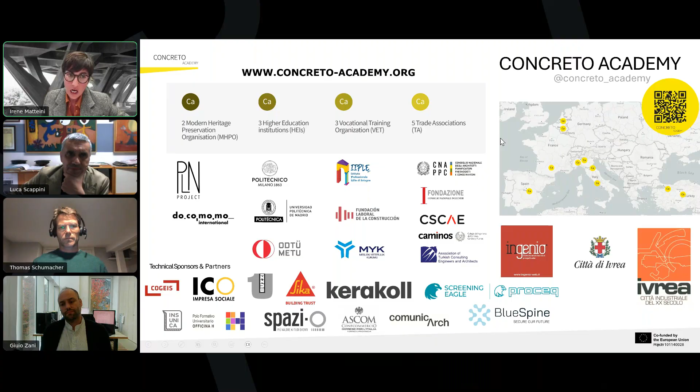We are now entering our third year, and we have a very large consortium of partners and technical sponsors that have worked hard to make this program successful. We address the increasing demand for specialized skills and craftsmanship in the conservation and preservation of concrete structures through different activities: online lectures, technical seminars like this one, field sessions, and practical laboratory exercises where professionals work with the people actually performing the work in the field. The ultimate goal of CONCRETO is to bridge the gap between the academic world and the professional construction world.

With that, I'd like to get to the topic of today. We are exploring the important role of conducting assessment, proper diagnostics, and monitoring for concrete structures, which should always be the first step we take when defining any repair intervention. We have two presentations today attempting to tackle the importance of this topic.

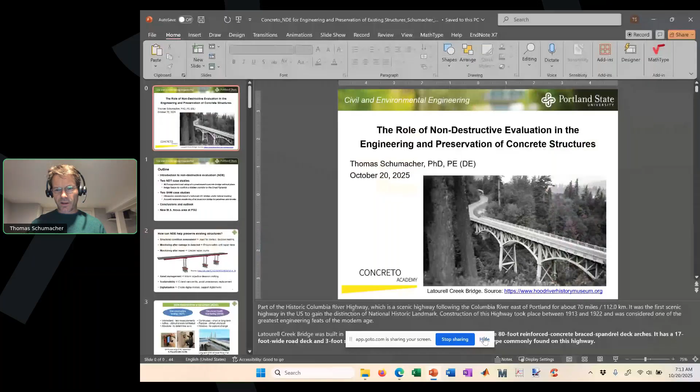Thank you again for having me today and giving me the opportunity to talk to you. As Irene said, I'm currently located in the US, but I grew up not too far from where you all are, in Switzerland. I've been very interested in non-destructive testing, specifically non-destructive evaluation, and I've always been interested in concrete structures throughout my apprenticeship in Switzerland and also through my studies.

This is a bridge actually located in the United States. I always like to show this first. This is Latourell Creek Bridge. It was built in 1914 as a 3-span bridge, a very interesting arched bridge with a truss system that's still operational today. Beautiful structure. It's located nearby a hike that we do with my family on a Sunday morning once in a while, on the beautiful scenic Columbia River Highway just outside of Portland. This is one of the structures that motivates me as to why we should really preserve the historic structures we have built.

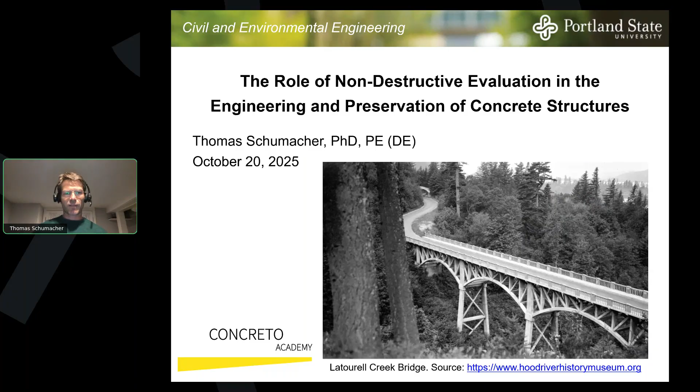A quick outline: I want to talk a little bit about non-destructive evaluation, what it is, and how we in the United States at least think of it. Then I have two case studies on non-destructive testing, both with a focus on imaging. I want to make the case for how useful imaging is, that it might not be as complicated to do as one thinks, and how much we can learn from it.

I have two studies. One of them, which will take the majority of the time, looks at a pre-stressed concrete bridge where no existing plans were available, but where an engineer needed to do a load rating, or structural evaluation. Imaging turned out to be extremely helpful in creating a digital cross-section of this bridge.

Then I want to show a project that's always fun to share. I've gotten involved in the Scan Pyramids project a few years ago and been very active, and I want to show some image fusion results there and how they were helpful in confirming a hidden corridor.

I have a couple of structural health monitoring case studies, but I don't want to spend too much time on those because our next speaker will talk more about it. I wanted to show how NDT and SHM can be used together to help with engineering and preservation of existing structures, then some conclusions and outlook. I'll also highlight a new Master of Science focus area we've created at Portland State University in this field.

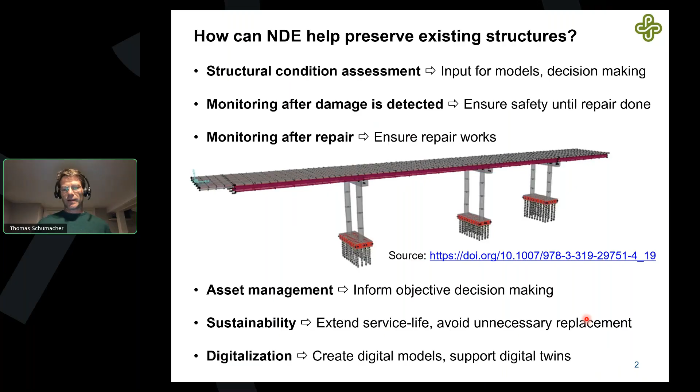Often we have models that might not be as accurate and might tell us we need a replacement, but if we install a monitoring system and use NDE, it might tell us that stresses are not as high as we thought, and we can extend the service life quite a bit. Then there's digitalization, an important term we talk more about now. We want to create digital models, digital twins, computer models that reflect as much as possible the actual structure. That lets us do tests, evaluations, and helps in decision making for maintenance and repair.

So what is non-destructive evaluation? We think of it as two approaches underneath. One is non-destructive testing, where we take an instrument or device to the structure - it's active, we control the stimulus, imparting a pulse that could be a stress pulse, an impact, or an electromagnetic wave like in radar. We control the source and look for the structure's response to it.

This gives us a sense at the time, a snapshot of the structure in terms of the geometry, or we could try to determine the condition of the structure. We do that once in a while - deploy instruments, then take them back off. Here's an example of a ground penetrating radar device a student applies on a concrete test specimen in my laboratory, for one of the graduate courses I teach.

Structural health monitoring is more continuous, long-term. We put sensors on the structure - it's passive, so we let the structure tell us what's going on. We record the response. We could also use active stimuli like a test truck or an impact, but typically it's passive, and that tells us the relative changes. We can't quite tell the condition at the time we start monitoring, but it will tell us when something changes.

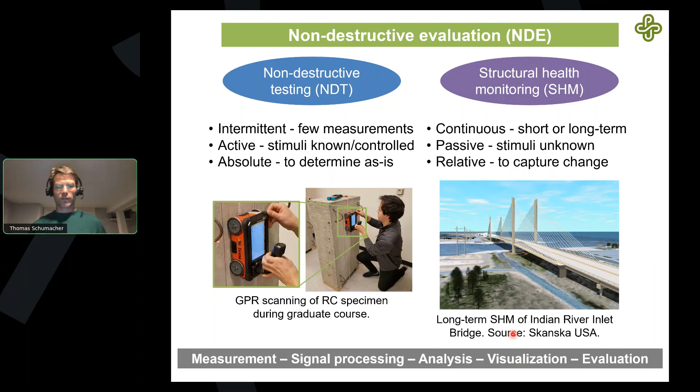Both NDT and SHM fall under this bigger term NDE - the terminology some of us have adopted in the US. Some terms are also used interchangeably. But underneath all of these is the idea of measurement, signal processing, analysis, visualization, and evaluation. These are terms civil engineers - that's what I am - are not always trained in, and that's what we're trying to push for, to bring more of these skills into the curriculum.

I'm active in the American Concrete Institute and used to be chair of the Structural Health Monitoring Committee. During my time, we produced a report that you might find helpful, which talks about the different technologies used in structural health monitoring for concrete structures specifically. We are now working on a second report that focuses more on what to do with the data produced by these technologies.

I'm now chair of Committee 228, non-destructive testing of concrete. You might be more familiar with this one. This is a pretty established report showing the different techniques used for non-destructive testing of concrete. We are currently working very actively on revising this report, which is over 10 years old, updating it with the latest information.

So how do we combine them? One idea might be like when we go to the doctor and get a snapshot. The doctor might listen to our heart, take our temperature, look at other things, do a blood test, and that gives an idea of the condition at that time. That symbolizes non-destructive testing. If there's an issue, we might get a heart monitor or some other sensor to wear, and that is the idea of structural health monitoring. From then on, we can keep track of what's happening and get real-time information.

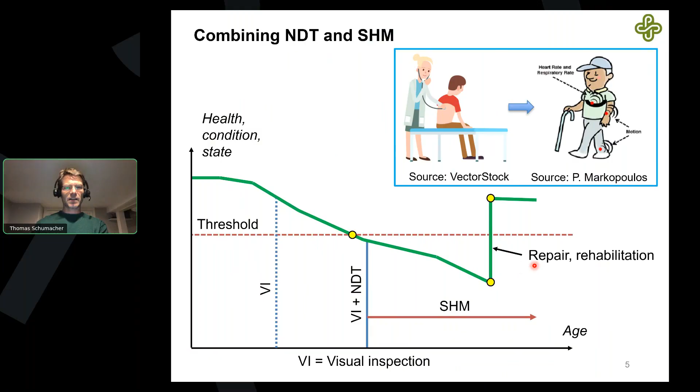Let me get into my two case studies. These first two case studies are basically related to non-destructive testing.

The first one is this bridge. It's not a particularly glorious structure, but it's very important for the owner. This is the only access to a non-profit organization that helps people with addiction recover. They were faced with delivery people saying they would no longer deliver across this bridge unless shown the structure could hold the weight of their trucks. So a structural firm was tasked with doing a structural evaluation, what we call load rating in the US, of this bridge. Because it was privately owned and built in the 1960s, there were no plans or drawings of any kind.

You can see this bridge has some green on it. This happens when a structure is exposed to the environment, and we're in the Pacific Northwest where we live. There's a lot of rain in the fall, so there's a bit of moss buildup. The good thing is, historically, no de-icing salts have been used in the Pacific Northwest, where we do get some snow but not much. So corrosion was not expected to be a problem. The visual inspection showed the underside of the bridge was very dense, with no cracking anywhere, just a bit of this moss. But the problem was we still didn't know what was inside - we really had no idea. It's simply supported, about 14.6 meters long.

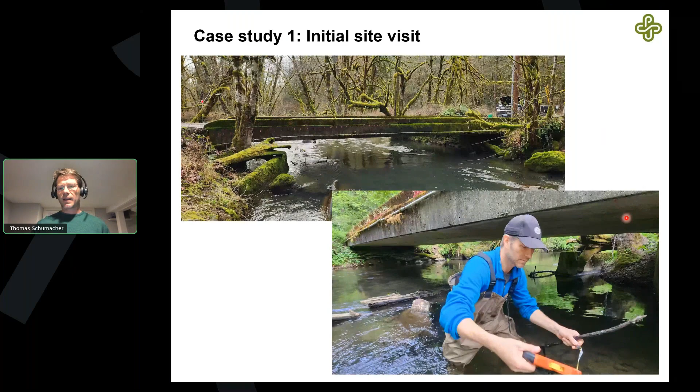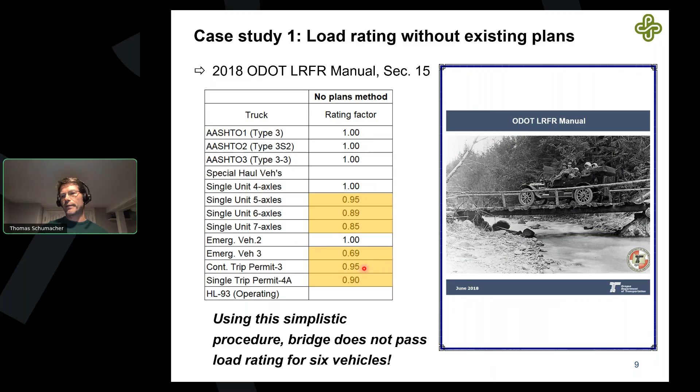For imaging purposes, we have GPR, ground penetrating radar. We did some impacting to do vibration testing. We also used a cover meter to measure the cover thickness of the pre-stressing strands at the bottom. I was able to convince the engineer that I want to drill a hole in the middle, vertically from the bottom, to hopefully reach that middle void we thought should be there, so I can measure that distance and determine if there's any water inside.

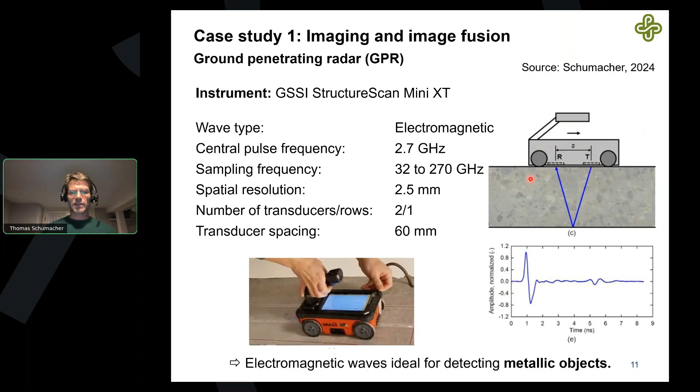This is about 40 kilohertz, based on an elastic stress wave. It's in the ultrasonic range, like 40 kilohertz is ultrasonic, so not in the audible range. The spatial resolution is up to you. You can basically put this instrument down, take a measurement, move it to the next position, move it to the next position. For this project, we used a 50 millimeter step, which gives you a spatial resolution of about 10 millimeters.

Stress waves or ultrasonic waves here are really ideal at detecting air voids and boundaries. So this is what you can use to get the thickness of a member, or in our case, we were hoping to see the voids inside, if there are any.

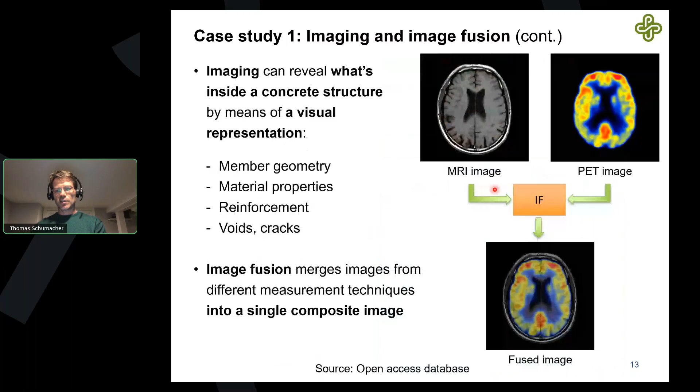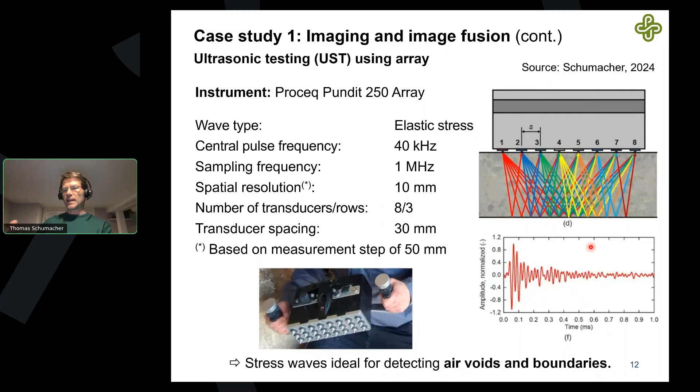So if my point happens to be on a reflector, then hopefully in the signal there will be an actual big amplitude that reflects that reflector. We're basically focusing with this SAFT method, trying to get the reflectors to get the big amplitudes in the signals and have them focused on these reflectors.

You might be familiar with a B-scan. A B-scan is a little different - it simply lines up all these signals side by side. This is a step further. This is really aiming to focus the energy to the reflectors.

There's two unknowns that we have to determine. One is wave speed, as I said, we calculate distance divided by wave speed. The wave speed needs to be determined - that's a function of the material. And there's a time offset in there that we also have to guess so that the reflectors eventually line up in the correct position.

So there's some calibration required. The cool thing is that once we have wave speed, that actually tells us a lot about the material. If we have a very stiff concrete, in the case of ultrasound, the wave velocity will be very high. If we have a low strength concrete, the wave velocity will be low. So there's some additional things we can learn.

There's a lot of processing that goes into this, and I want to stress there's no one way to create such an image. There's many things that can be done to enhance the image, so one image done by one person might look different than an image done by another person.

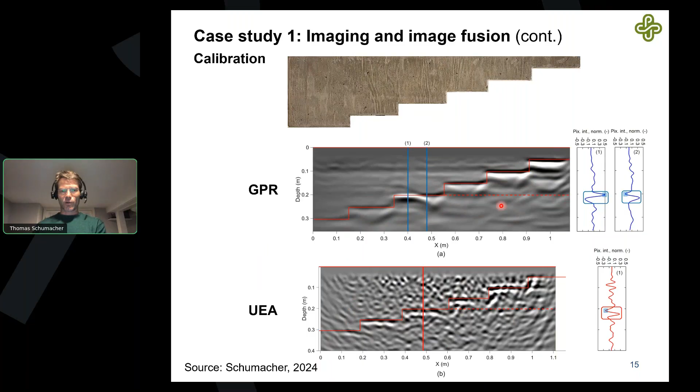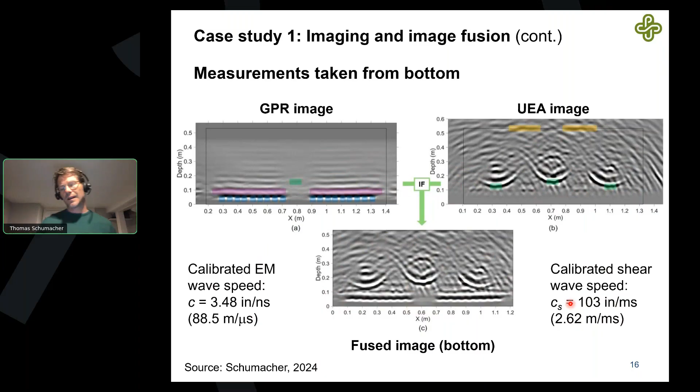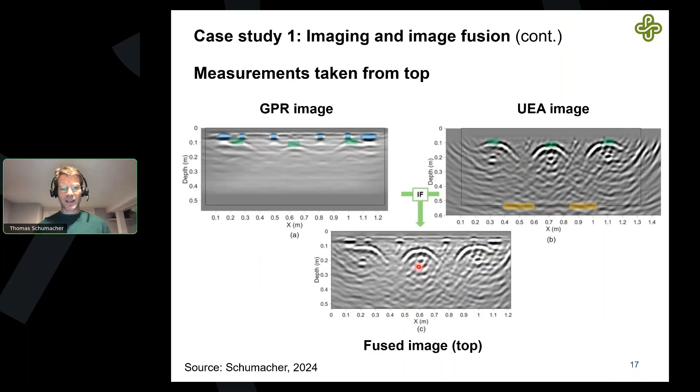We fuse them together, we get this. And then we said, okay, why not fuse the bottom and the top together? So we have this image here from the bottom, we have this image from the top, we fuse them together, and now we basically have a cross section that we can work with. It's still a little bit noisy, but we have all the information in here. We see the voids very clearly, we see the reinforcing on top, we see the pre-stressing strands at the bottom, and we know that they are correct because the reflectors of each match, and we also could see the back wall. So this is now a confirmed image that we can use. We can go in and actually read out dimensions. I will revisit this.

Here's just some results from the vibration testing. I used a simple cell phone based measurement here - that's phyphox, an app that you can use to measure the vibrations, the acceleration response. We just jumped on the bridge, measured the response. We identified some modes, some flexural modes of the bridge, some torsional modes.

We did build a finite element model, a slab model, and came up with these, basically played with the material properties, and we also tried to fill the voids with water and fill the voids with air. And the best results we got to match these peaks in the model told us the voids are most likely air filled.

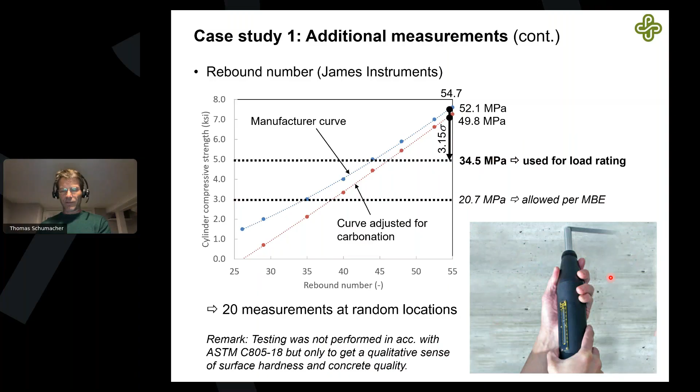There was really no indication, just looking visually at the drilling combined with these measurements, that this should be a problem.

With the rebar detector, we used this Profoscope to get a mean cover of about 36 millimeters for the pre-stressing strands at the bottom. This is showing a photo from inside the duct, looking at the formwork. We drilled from the bottom into the middle void and pushed the camera up, and you can see the formwork material. No water came out, which is a second confirmation these voids are dry, not water filled.

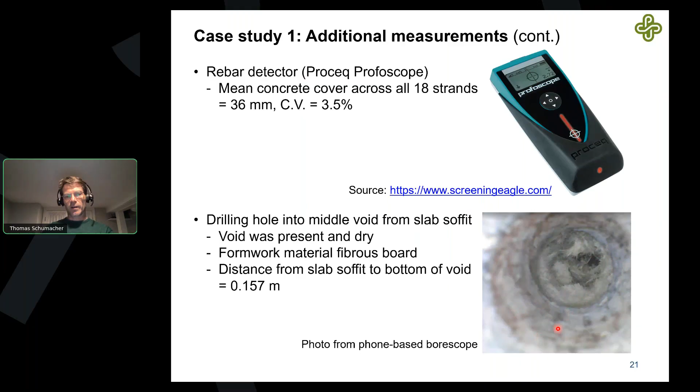We also showed this fibrous board. The measurement from the bottom of the slab to the bottom of the void was about 157 millimeters. So we can take this and determine all these measurements, including the size of the void, which helps us determine the self-weight of the structure exactly, an important part of the structural evaluation.

Based on the reflectors, we can measure the cover. In the image we got about 38 millimeters, and the rebar detector said 36, so we're very close there. The distance from the bottom to the middle void in the image told us it's about 155 millimeters. We measured 157, so we're within a couple of millimeters. This has turned out to be very useful.

This is what we anticipated, and this is what we had, and it turns out they were very close, except for the cover of the pre-stressing strands, which was a little bit different. But now we knew exactly what to work with.

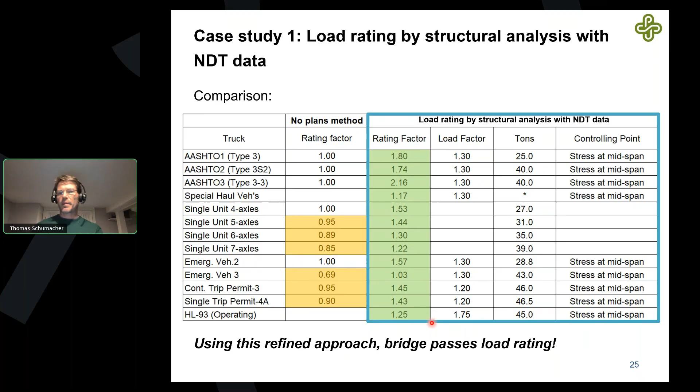The engineer redid the load rating, this time using the exact digital cross-section I showed you earlier with the simplified method. We now had rating factors that were basically above 1, even for emergency vehicle number 3, meaning this bridge is safely able to carry all the different truck types that are legal in Oregon, including emergency vehicles. That was a big relief for the owner of the bridge, so very useful.

Case study number 2 is about the Scan Pyramids mission. I want to show you how imaging was very useful here. This is the Great Pyramid in Giza, and this is the north face. You can see what we call the chevron. Right below these big chevron blocks was the original entrance to the pyramid that leads to the different chambers.

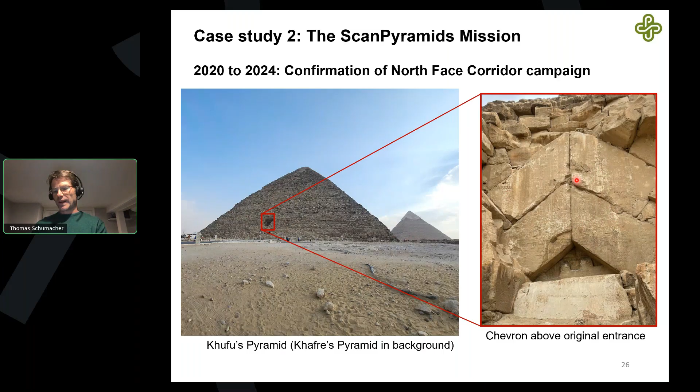There was a suspicion that behind these blocks might be a hidden corridor, determined based on measurements done with muon tomography. Muons are particles that exist in the universe and fly around. They're not harmful, but if you set up detectors and detect them, it's basically the analogy of X-raying the pyramids, but done with a passive source using these muons.

These measurements were done in the 2015-2017 range. Scientists from Japan said there might be a big void currently not known in the pyramid. This is a cross-section through the Great Pyramid showing existing known structures: the Queen's Chamber, the King's Chamber, the Grand Gallery, and so on. But they said there's a big void deep inside the pyramid, and behind the chevron it appears there might also be something.

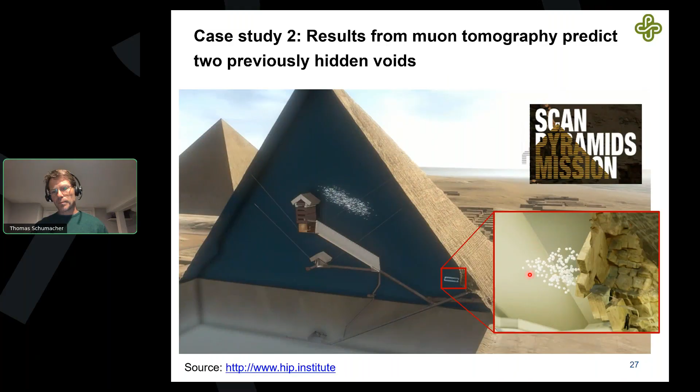So we were pointed to this area. We went there and applied radar and ultrasound with the same tools I introduced earlier. We also used electrical resistivity tomography, which gives an indication of the electrical resistance of the underground. These three techniques were applied to the chevron blocks, which you can see are over 2 meters wide.

This is the application of radar in the vertical direction, pulled up by a cart. Here's one radargram showing a strong reflector at about 90 centimeters depth. This is ultrasound, again the same device, applied in the horizontal direction in this case. At a depth of about 90 centimeters, again a very strong reflector showed up.

Electrical resistivity tomography - these are the electrodes glued on or attached. You inject the current, you measure resistivities at the other electrodes, and you can then reconstruct the resistivity map. This is actually a vertical cross section, and these are the chevron blocks here. You can see there's a high resistivity volume behind the blocks, and that's one of the things we couldn't tell with radar or ultrasound.

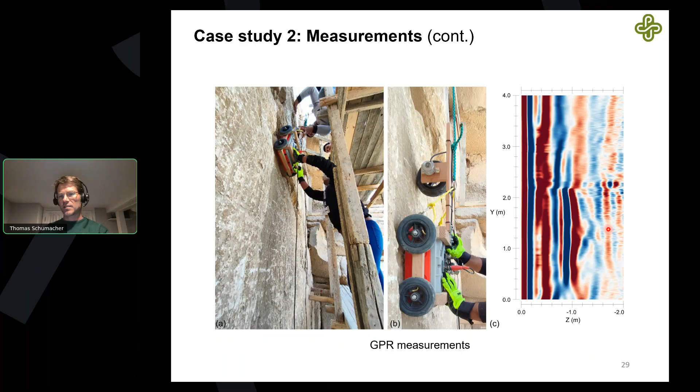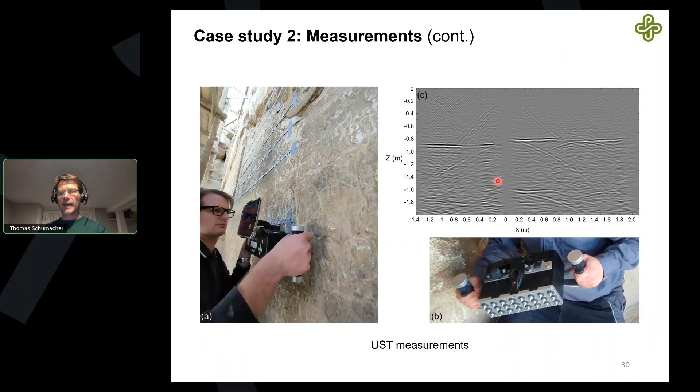We could tell there's a reflector, but what you can't tell is what is behind that. Is it just a 1 centimeter air gap? Is it a 1 meter air gap, or is there an even bigger void behind? Electrical resistivity tomography showed that there might be a much bigger void behind it.

Imaging and image fusion then helped us reveal that. I'm showing here a view of the chevron again, with a horizontal cross-section on this side. This unites all 3 measurements - we fused the images from GPR, ultrasonic, and electrical resistivity tomography together. We could see very strong reflectors here in 2 locations, around 90 and a little bit more like 80 centimeters, and then behind it there's this big high resistivity volume, indicating that there might be air.

On this side, you see the reflector, based on a GPR measurement. So we were basically able to show that in this horizontal cross section, there's the blocks that we can see, blocks 3 and 4, and behind it might be a big air volume.

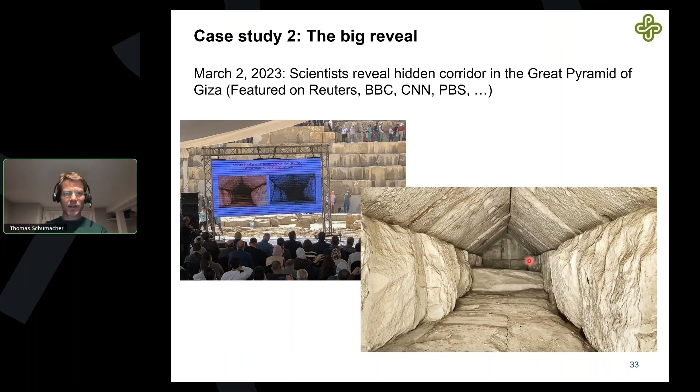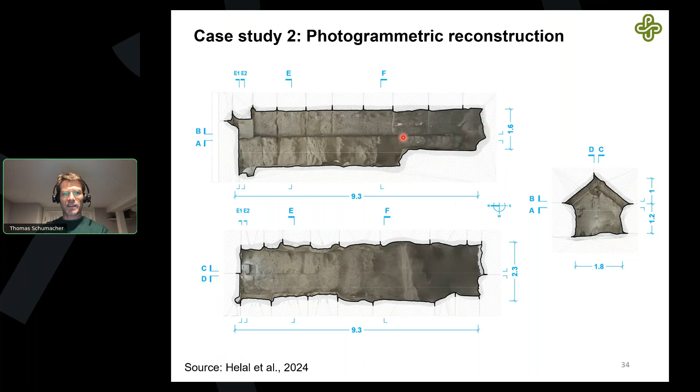And that's what was revealed in March 23. They were able to push a teeny little camera from below into this, and that's what they found - this cross section, about a 9-meter long tunnel. That was a big reveal. Since then, researchers have created photogrammetric reconstructions of the tunnel, giving you a better sense of what it looks like.

I want to mention that this is a big effort. I work with the Technical University Munich on this project. Cairo University is really the technical lead on this, and everything, of course, is under the scrutiny of the Ministry of the Antiquities of Egypt. But we are a big international team working on this, and this is ongoing.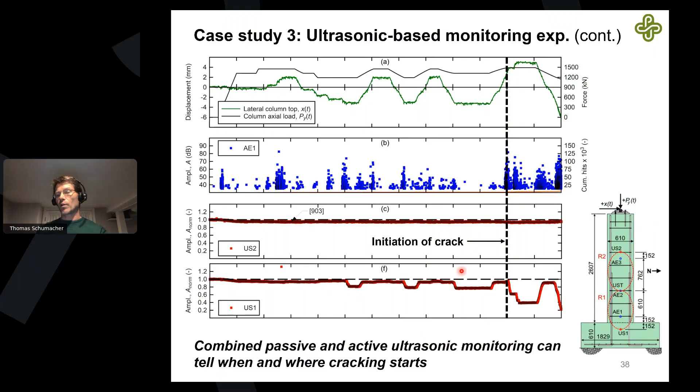So here we wanted to show that these two approaches can also be done with the same equipment, and can be very useful to assess a concrete structure over its lifetime. Here there was some emphasis on an earthquake - so what happens during an earthquake, what happens after an earthquake.

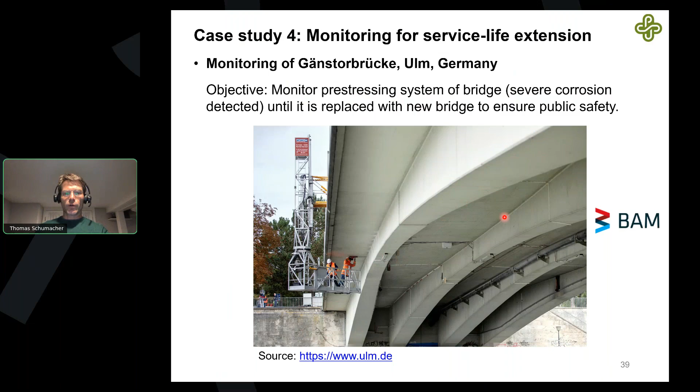This is a real-life study where passive ultrasonic monitoring, so acoustic emission monitoring, was used to monitor pre-stressing wire breaks in an old system in Germany that had issues with corrosion. They instrumented the whole bridge with strain gauges, displacement sensors, and the green sensors you see are acoustic emission sensors, based on ultrasound.

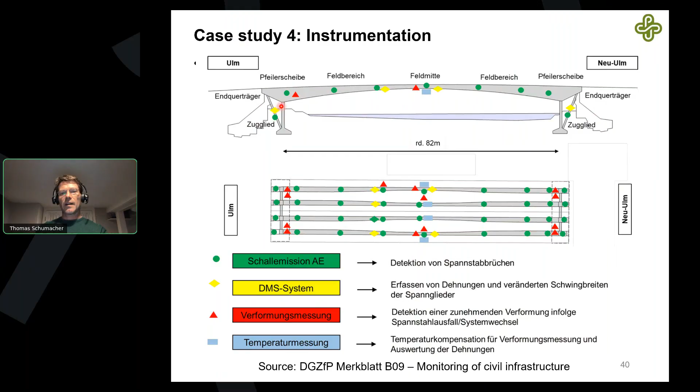This bridge is now being replaced, but it was a really great case study to show how structural health monitoring can be used: a problem is found, the bridge is instrumented, and it can be kept safe. I think the maximum weight of trucks was reduced to make sure there were no issues, as a way to keep the structure safe for the public while you figure out a solution.

So to wrap up, NDE—both non-destructive testing and health monitoring—I think is a great support tool that is helpful in the engineering and preservation of existing structures. With NDT, specifically with imaging, we can really get an idea of the structural condition as it is, a snapshot. And with SHM, we can then monitor changes over time.

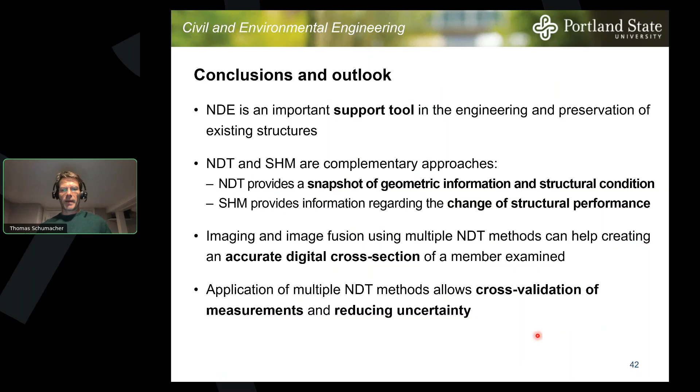We can get really accurate digital cross-sections. If we can do all the measurements that are useful, it's not that difficult to do, but extremely helpful. And using multiple methods at the same time is always recommended for cross-validation of measurements and reducing uncertainty.

Thank you, Irene, for the introduction, and good afternoon everybody. First of all, I would like to thank the Fondazione and the CONCRETO Academy for having me here. This is a nice occasion to share with you some of the information I gathered over the years working on several infrastructures distributed across the Italian territory.

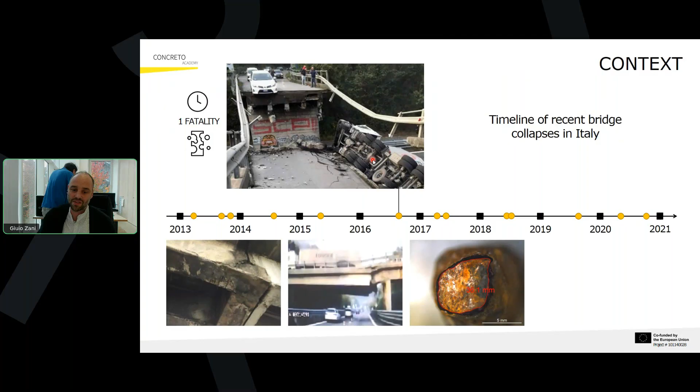First of all, I would like to start with some context, because it's very important to understand the place in which we're working and the reasons why we need to design monitoring systems and develop diagnostic investigations which help our understanding of the safety level of structures. Over the past decade, we observed in Italy several collapses of infrastructure and bridges.

So what you see in this slide is a timeline of recent bridge collapses which took place in Italy. You see a series of yellow dots highlighting the frequency of these collapses, which of course appears to be quite challenging and quite worrying also for the general public.

For sure, one of the first collapses that raised global awareness and also pushed people into understanding more about existing infrastructure, and pushed politicians and managers into carefully observing structures over time, is the collapse of the Annone overpass. This collapse was related, according to the assessment carried out during the trial, to corrosion-related problems.

So in the presence of severe cracking - you see this picture here inside the Gerber saddle - the lack of robustness led to the failure of the whole deck. During investigations, some of which were carried out here at the Politecnico di Milano by Professor Di Prisco and my research group here in Lecco, it was related also to some corrosion phenomena.

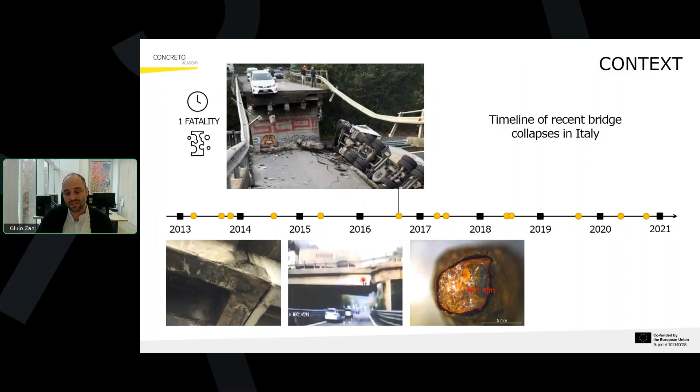So the presence of contaminated waters which attacked the reinforcement, leading to a loss of cross-section and finally to a collapse. But just two years after this event, which took place in Lombardy, we all know what happened in Genova. There we had the failure of a very important structure, the Viadotto Polcevera, which caused 43 fatalities. This was very impactful, and it was a confirmation of a worrying global picture, which stresses the need to carefully observe, maintain, preserve and strengthen existing reinforced concrete structures or existing infrastructures in general.

Something I would like to point out is that everybody observed that the majority of recent structural failures took place in reinforced concrete and pre-stressed concrete bridges. This is a very important point because some people thought that these failures were mainly related to the material itself and not to the lack of maintenance or the natural aging of this infrastructure.

What we need to stress is that way more than 50% of Italian bridges are actually made of reinforced concrete and pre-stressed concrete. This is because concrete still remains today a very cheap material, which can promote the development of infrastructure in different countries, also in developing regions, because of its possibility to be shaped into different sizes and shapes, and to create large infrastructure which can support traffic loads or be used for energy production.

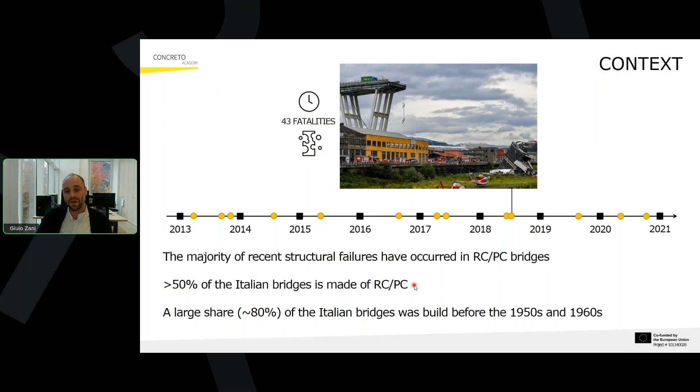So a larger share, about 80% - this is generally complicated to carefully estimate these numbers, but about 80% of the Italian bridge stock was built before the 1950s and 1960s. This is a very interesting observation because we can realize that most of these structures have surpassed the expected service life which was conceived at the time of their design.

So at this point, one might ask, is it just an Italian problem? And the answer is no. Some years ago, I had the chance to attend a presentation by Phillip Yen, who is a chief engineer at the Federal Highway Administration in the United States. The FHWA has in charge about 600,000 highway bridges over more than 4 million miles of roads in the United States. What surprised me is that over about 30 years, between 1980 and 2012, they recorded more than 1,000 bridge failures.

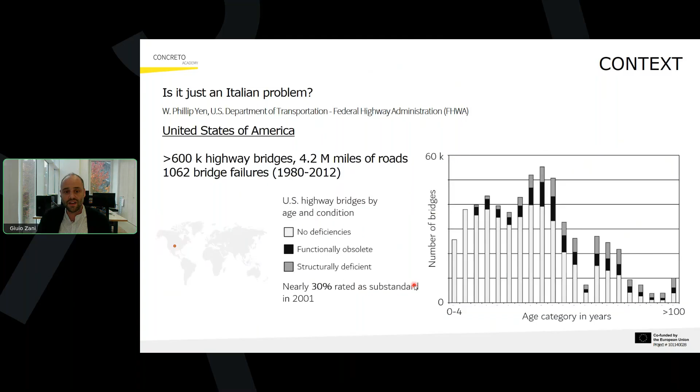According to a rating carried out in 2001, nearly 30% of bridges in the United States are classified as substandard because functionally obsolete or structurally deficient. So this is a global problem. If we look at the causes of these 1,000 collapses, we see that in most cases the causes are naturally related - floods and scours, hydraulic related phenomena - while degradation counts only 7%. But this is not a small number, because as time passes, the possibility of degradation-triggered failure becomes larger and larger.

According to another study, again from the United States, in which researchers studied a sample of 500 bridges of various types that failed between 1989 and 2000, they observed that about 50% of total bridge failures were associated with structures made of steel, not concrete, as we observed for the Italian case. In this particular sample of bridges, only 10% of failures were associated with concrete-based structures.

This is something that imposes a reflection on the reaction we are having in Italy about these failures, because in most cases the post-failure actions consisted in the substitution of original reinforced concrete or pre-stressed concrete structures with steel structures. We see the case of an overpass now substituted with a structure made of weathering steel, and other cases like the Fossano and the Genova bridges, where the main deck is now made of steel.

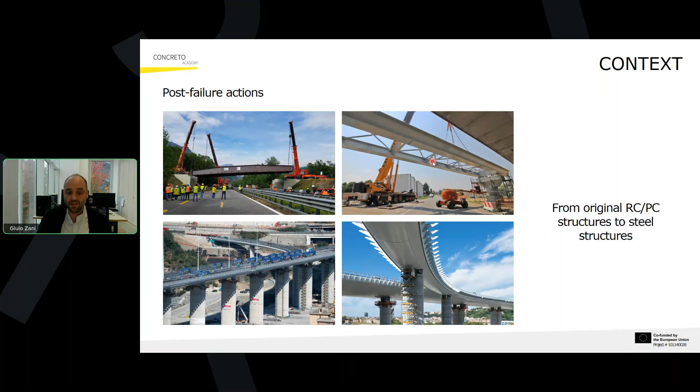So this is a key point, and I wanted to stress it because, discussing with many managers and engineers, I have the feeling that at some point we had a misconception of reinforced concrete as a dangerous material and steel as a more reliable material. But this is not fully true, because we just observed that in different countries, based on different technological and construction traditions, we might see several failures also in steel structures. So the material is not the main point - this is not a problem related to material, but to the lack of maintenance and the lack of observation.

The Viadotto Polcevera was a very important bridge because it was a pioneer application of pre-stressed concrete technology. As most of you surely know, pre-stressed concrete technology was imagined and patented at the end of the 19th century, but only after World War II was it possible to build significant full-scale structures, because of the new materials - the new high-strength steels which became available after World War II.

But the choice, even though this bridge was very clearly welcomed as an innovation also on local newspapers, was to demolish the remaining parts of this bridge. This was also contested by many people in Italy, because this was an example of cultural heritage. This was a testimony of Italian engineering and the advancement in design, and this is lost forever.

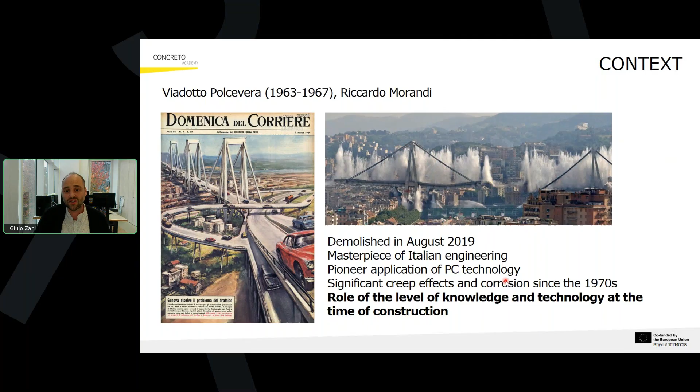This is still under investigation, but in this case, one candidate for the cause of collapse of this bridge is corrosion. We know now that corrosion is a big issue in reinforced concrete. We have several initiation parameters like carbonation, the presence of chlorides, acid rains, and sulfates, but this is not enough.

In general, if you have a structure, for instance this bridge, subjected to carbonation and the presence of chlorides, which might be related to airborne salinity or de-icing salts, this leads to the depassivation of the reinforcement. But in order to develop corrosion products, you always need moisture and oxygen. This finally leads to the creation of corrosion products, which have a volume that can increase about 7 times with respect to the original material, inducing self-stresses and finally the loss of the concrete cover.

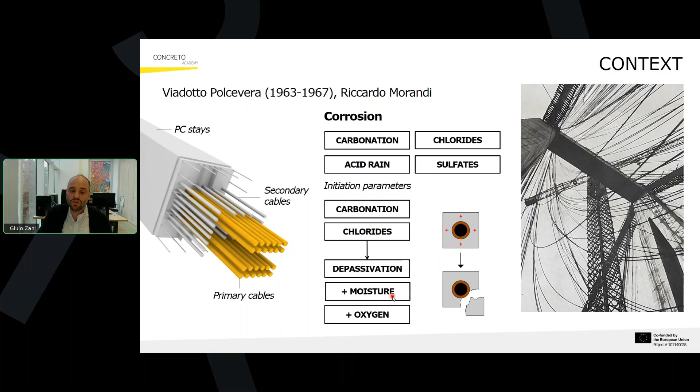Moisture is one of the ingredients that, in my experience, I always observed in all the structures which were severely corroded. So it's a very important ingredient.

If we go back to one paper by Riccardo Morandi, we can understand that since 1979, about 10 years after the design of this bridge, he realized that the bridge was subjected to slow deterioration because of the effect of movable loads and environmental action. He also realized the role of the advancement of technique and technology of pre-stressed concrete, because he was a pioneer in the application, and he understood that these had some limits in terms of understanding the complex phenomena behind this kind of structure.

So his suggestion back in '79 was to carry out careful observation of the structure over time and carry out, in a quick and proper way, some remedial works, some interventions. He also stressed the role of the aggressiveness of the atmosphere - we are very close to the seaside - and stressed that he considered two possible options: one structure made of pre-stressed concrete, and the other made of steel. At the time of design, he realized that maintenance cost would be much higher in presence of a steel solution.

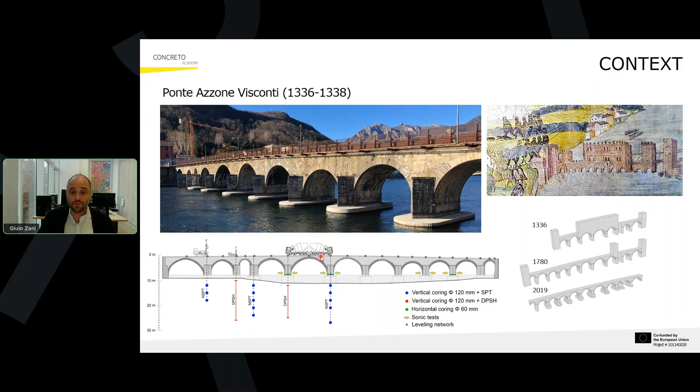This is a case in which we carried out a series of diagnostic investigations, including investigation on the soil beneath the foundations, and a series of non-destructive and partially destructive tests, including a load test on the biggest span of the bridge to understand the maximum service load which could be introduced to the structure.

But if we think about heritage, we have different examples which are not generally so recognized as Middle Age structures. The first one is the Ponte del Risorgimento, designed by Pierluigi Nervi. I had to include this because I'm responsible of the Laboratorio Nervi here in Lecco, and I couldn't avoid including something about Pierluigi Nervi.

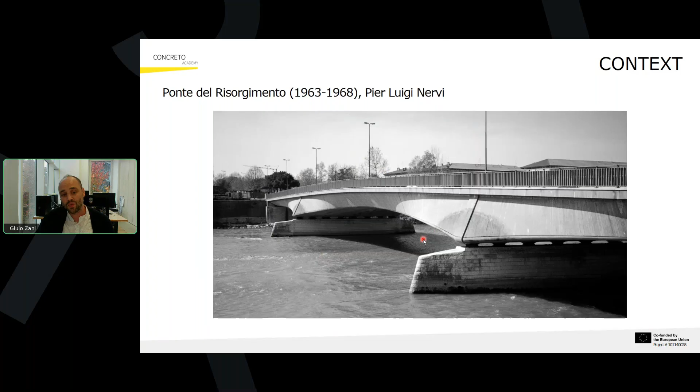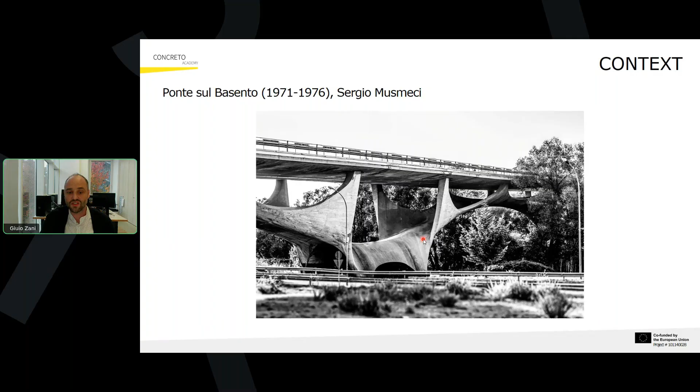Given the context, I would like to stress that in 2016 and 2018 we had two significant failures which raised awareness at the national level on this problem. Nowadays we have guidelines which guide managers and engineers in assessing the safety of existing bridges, but back in 2018 the national guidelines were not effective.

Regione Lombardia launched a research project together with the Politecnico di Milano, signing an agreement on the definition of criteria and guidelines for the maintenance and management of road infrastructure. We have a very large region, a very large population, about one sixth of the whole Italian population, and the estimated number of strategic bridges is more than 10,000.

We involved inside this project a group of more than 20 professors, postdocs, and PhD students across 4 different departments. One of the objectives was to develop management and monitoring guidelines and also select a set of demo cases which could be used as benchmarks for the preparation of these guidelines.

Today I will be discussing and introducing you to one of these case studies on which I was particularly involved.

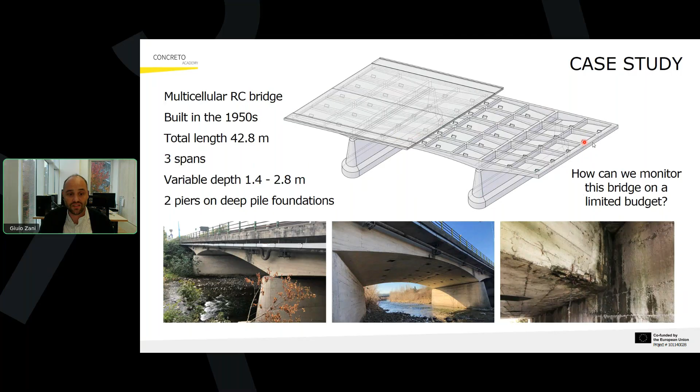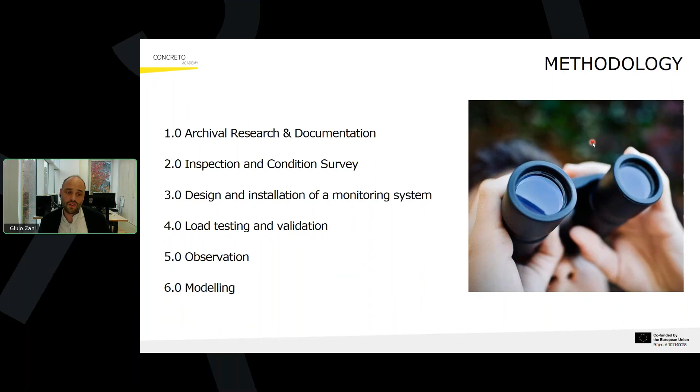In addressing this methodology, we had to design a step-based methodology which could be extended to several bridges across the region. First, archival research and documentation, followed by inspection and condition survey, then design and installation of a static monitoring system designed for maintenance management. This was then validated and followed by load testing, observation, and finally numerical modeling to construct a digital twin of the bridge.

In assessing the bridges considered in this project, we analyzed about 290 bridges in Lombardy, and for all of them we tried to collect as much documentation as possible, including the original documentation. This is not a simple task, because in only about 48 cases out of 289 did we have both design reports and technical drawings. This means that such gaps are quite common.

As we saw before with the previous speaker, a presentation in which no technical documents were available, this stresses the role of inspection and diagnostic work. We carried out a series of investigations on this bridge, but had a limited budget—about 40,000 euros for both the diagnostic investigation and the development of the monitoring system that I'll explain next.

You see that in most cases, corrosion phenomena are localized in regions with the highest humidity, so the lack of a drainage system or the presence of leaking joints.

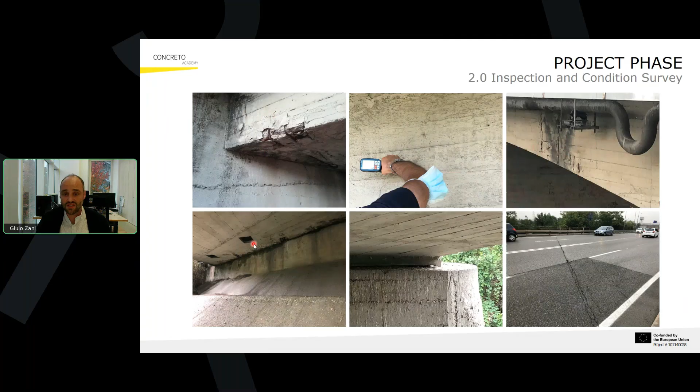In terms of the inspection activities carried out: first a laser scanner survey, followed by a photogrammetric survey, ambient vibration tests to assess the dynamic properties of the structure, followed by concrete coring. The number was limited, but we were able to carry out ultrasonic pulse velocity tests, carbonation tests, and uniaxial compression tests.

Then we performed some carbonation tests on the piers, some radar scans—GPR on both the piers and the deck—and a series of sonic and ultrasonic pulse velocity tests on both the deck and the piers.

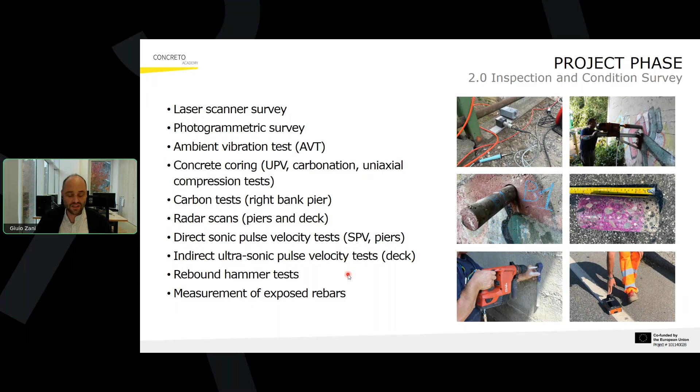We also developed rebound hammer tests at specific locations, particularly close to the concrete coring, and then distributed throughout the whole structure. Where possible, we also measured the exposed rebars to understand the differences between the original design and the final as-built situation.

This is very important because, thanks to the three-dimensional laser scanner, we had a very good geometry of the structure. With orthophotogrammetric imaging, we could also trace the existing cracking pattern. This supported us in defining the correct location of the devices and transducers that I'll be discussing next.

One key point we observed is that in the original drawing, obtained from the manager of the structure, we could count 1, 2, 3, 4, 5, 6, 7 girders in the cross section of the deck. But just by observing the structure from the bottom and interpreting the 3D laser scanner, we realized the number of girders in the as-built situation is just six. I always try to point this out because it's very important.

After this initial assessment, we also obtained calculation reports, for instance for the passage of heavy trucks over time on this bridge. We realized that many technicians actually used the original design information to assess the safety of this bridge for the passage of large trucks. This is dangerous because it leads to an overestimation of the capacity, since you're considering one girder more than what is present in the as-built situation.

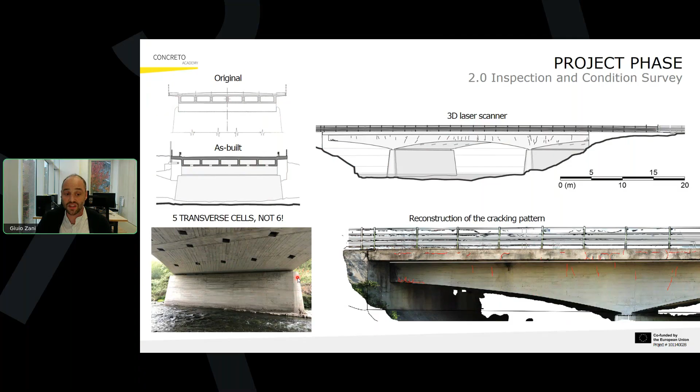Sometimes just a careful observation—counting the technical holes that we have—lets us estimate the number of cells, and so the number of girders, revealing a difference between the original and as-built design.

In the assessment phase, we had the possibility to carry out mechanical characterization tests on concrete. In particular, we carried out coring, over which we measured ultrasonic pulse velocity and carbonation. The carbonation front is pretty deep—60 millimeters, 35 millimeters—depending on the porosity of different materials.

Besides the homogeneity measured by ultrasonic and sonic transparency tests, we were able to obtain information from the coring. After 70 years, we have two strengths: the pier is much more porous and lower quality concrete than the deck. But we were able to go back to the time of construction.

Just 28 days after casting, thanks to formulations found in the Model Code 2020, we obtain strengths in line with the materials used in the 1950s. This is extracted from a database built by Politecnico di Torino, thanks to the collection of several certificates issued by university labs. So for different decades, we have an idea of the range of strength that was actually used.

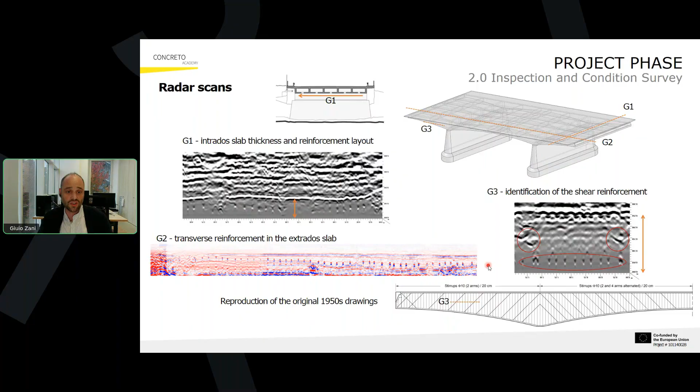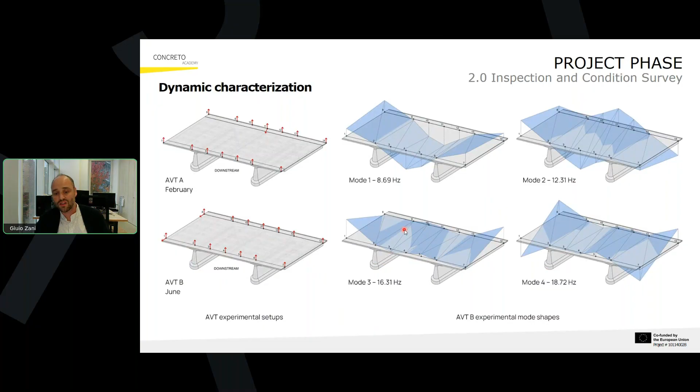The dynamic characterization allows us to obtain the frequency of the mode shapes and to reconstruct the dynamic characteristics over different configurations and environmental conditions. One test was carried out in February and one in June, finding just some modest differences between the two.

We had some tilt meters to measure rotation. We have deformometers to measure displacements and also crack opening. And then we have some surface temperature sensors, one weather station, one hydrometer to measure the level of the river, and also a digital camera.

We were lucky enough in this case to have a bridge with a cantilever part. This meant we could fix the base of the transducer on the abutment, and the head of the transducer to the intrados of the deck. This allowed us to measure the vertical displacement at the end of the deck, which is not always feasible on a bridge structure. The installation took place over a couple of working days, thanks to some climbers who installed the devices on the structure.

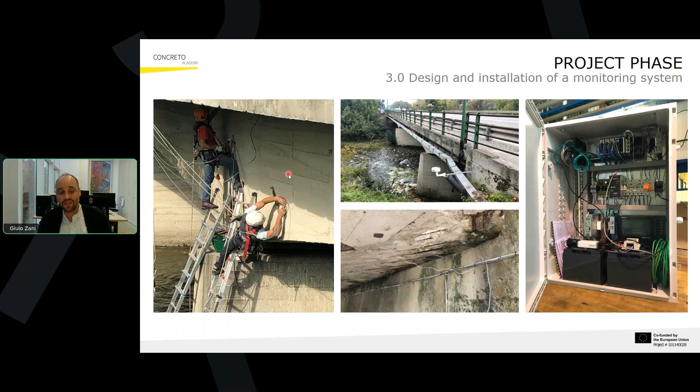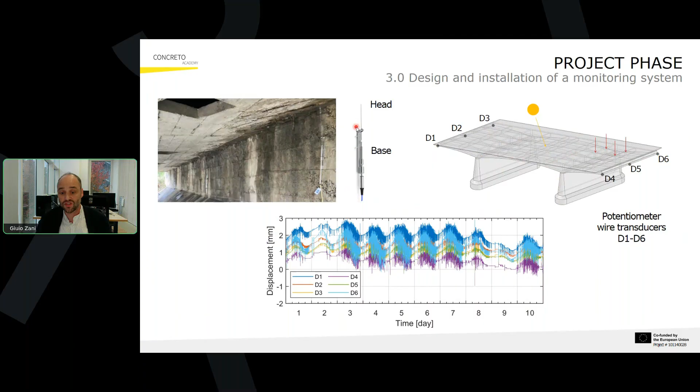This is due to the fact that even though these devices were conceived and designed for static monitoring, we acquired and recorded the information at a sampling frequency of about 40 Hertz, also capturing information associated with the passage of moving loads, the passage of vehicles.

At this point, we decided to run a moving average to extract the behavior associated with thermal loads, and by taking the difference between these two measures, we obtained the displacement associated with the variable loads alone. You can see that on the days with the least traffic, Saturdays and Sundays, we have smaller displacements because we don't have large trucks.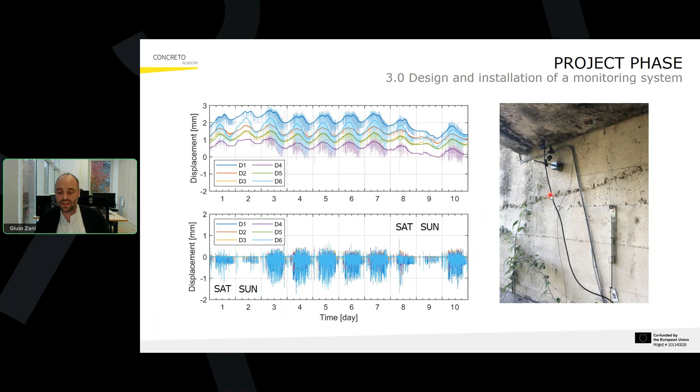We also validated these measurements, since this was made with a static monitoring transducer, with a laser sensor, which is able to obtain information at a higher sampling frequency in a more precise way. From these, we observed that the actual measurements obtained from the static transducer are pretty comparable to those from the laser.

In some cases, we lost some part of the information because of friction, internal friction effects inside the transducer, but we were able to assess that ordinary traffic induces in this particular bridge displacements which can occasionally be larger than 2 millimeters, about 2 millimeters being the threshold of these vertical displacements.

A key point in assessing this bridge was also validating the monitoring system by means of a load test. We had the occasion to install the monitoring system because of the scheduled passage of a heavy goods vehicle. This was a massive truck: 34 axles, 76 meters long, 380 tons of global weight.

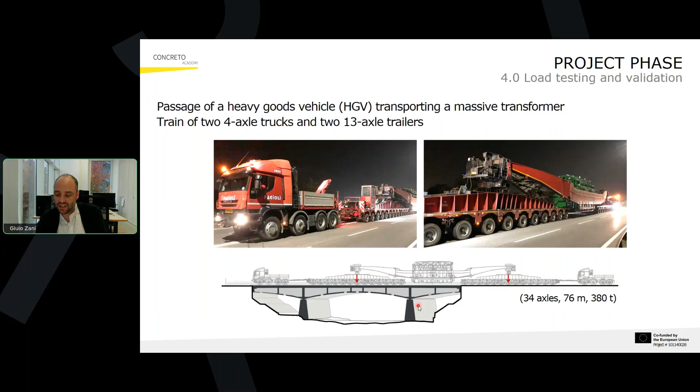We could impose two loading conditions: one stressing mostly the central span, leading to a positive curvature, and one stressing mostly the two overhanging spans, the cantilever spans at the two sides of the central one, leading to a negative curvature of the deck.

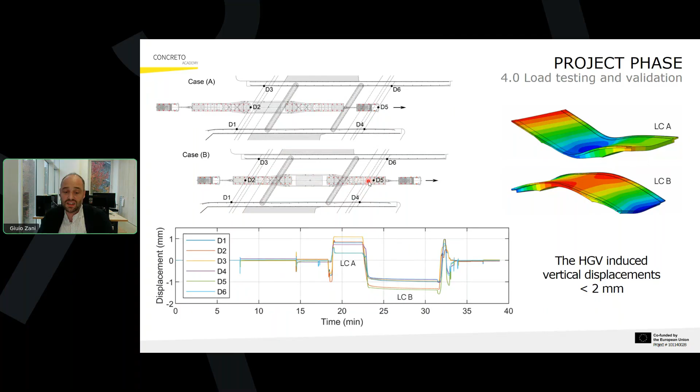This is the measurement provided by our monitoring system, reading displacement D1 to D6 at the end of the deck. What is interesting to observe is that these heavy goods vehicles induce vertical displacements which are generally smaller than those observed under ordinary traffic conditions. This is very important because in most cases there is the common idea that exceptional load is always less safe than ordinary traffic, but in some cases it is not, because we need to consider how distributed this load is, how slow it moves, and that the passage was in a central position and not an eccentric one.

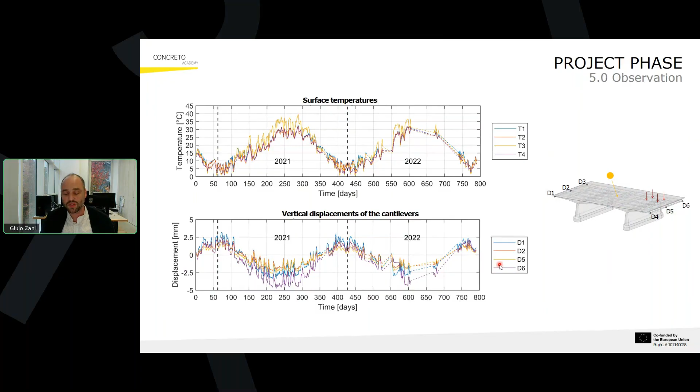Over time we had the chance to observe the structure, understanding that both temperature fluctuation and vertical displacements tend to have an effect related to the seasonal change, with no particular change between two subsequent years.

However, we also measured with some transducers the integral crack opening displacements in these cracked areas, assessing that over time we have a limited but pretty clear increase of crack opening. So this is something that should be worked on and understood with higher precision.

Thanks to the tiltmeters that we installed, we were able to record the rotation of the deck, both flexural and torsional rotations.

A pretty nice way to understand whether a measurement is just environmentally related or also related to the effect of moving loads or different degradation phenomena is to plot the displacement values with respect to temperature. This is the overall measurement of two years - two years of measurements. This is big data, as they call it, so it's pretty complicated to work on. But what is clear is that here we have a correlation between temperature and displacement.

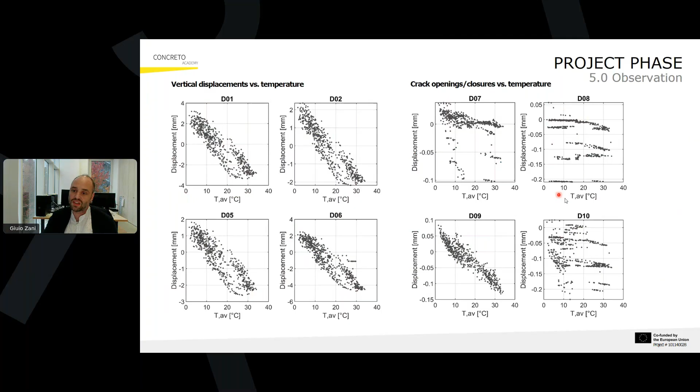In some cases the correlation is pretty clear, so we can assess that this is mostly related to environmental effects. While in other cases, such as the cracks or transducers monitoring crack openings, we don't see a clear linear correlation. This means that this is a phenomenon which is not strictly related to temperature variations.

Something very important was the model updating. This was the final phase of this research, in which we were able to calibrate a numerical model on ambient vibration tests. Here you see the comparison between one mode shape on one side of the bridge, between the red curve, which is the numerical one, and the black and light blue ones, which are associated with the experimental measurements, and also the cross MAC matrix, which highlights how the numerical model gets closer to the real measurements.

We were able to calibrate the numerical model on these measurements, which is generally done, but also to validate this model on the load test which we performed with this heavy goods vehicle.

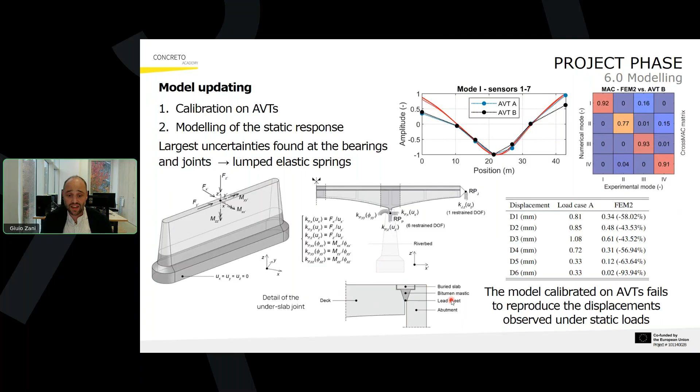We realized that the model calibrated on ambient vibration test fails to reproduce the displacement observed under static load. This has to do with existing structures in which we might have some friction effects at the supports, some nonlinear behavior at the joints. This is a very complicated joint with some bitumen mastic, a buried slab, and then a set of technical layers above this joint as well.

So this is important, because only after a further calibration of the static model were we able to obtain a good agreement between the numerical results and the experimental measurements we carried out during the passage of these trucks.

I will now proceed with some conclusions, because time is almost over.

What I've shown you is the monitoring of a 70-year-old reinforced concrete bridge which is still operating on a heavy traffic network. The diagnostic campaign revealed that you might find significant discrepancies between the design documents and the as-built situation, and this confirms the need for on-site validation in safety assessment.

Tests also highlighted some degradation risks, such as carbonation-induced corrosion, and confirmed material properties typical of 1950s reinforced concrete construction.

It was very important in this case study to understand the existing cracking pattern and to record and detect it in order to target sensor placements. This also allowed us to obtain a cheaper version of the monitoring system, by locating the transducers at the needed locations, but it also highlighted the need for continued monitoring.

In this case, the static monitoring system, even though limited in terms of the number of transducers, captured displacement and rotation, including the effects of moving loads, which was something not expected at the very beginning.

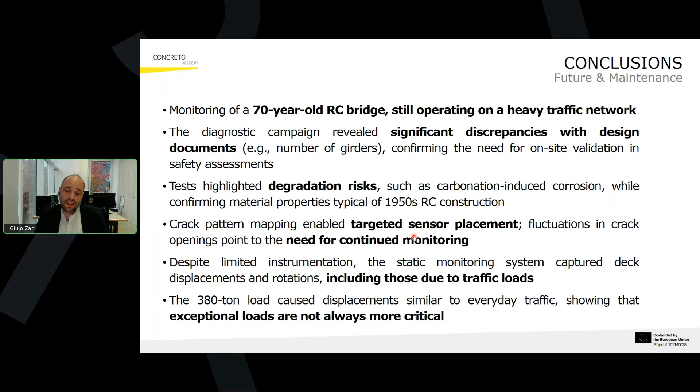The load test shown that exceptional loads are not always more critical than ordinary traffic conditions. We also found some discrepancies, so please be aware that optimizing and tuning the numerical model on ambient vibration test is sometimes not enough, because it's always important to also have a static load test to understand whether the modeling is effective.

And the knowledge that we produced thanks to this activity is now being used in maintenance and retrofitting works. So it was given to the designers, who are now addressing the interventions planned on this structure.

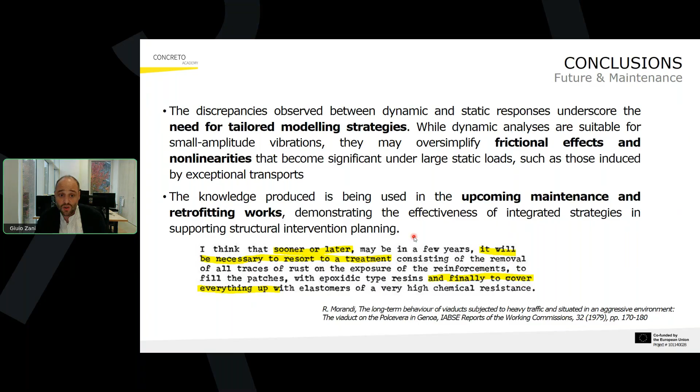I reported here again one sentence from the previous paper by Morandi, in which he understood that sooner or later, maybe in a few years, it will be necessary to resort to a treatment and cover everything up with elastomer of very high chemical resistance. This is something we generally do, but it's important that we should postpone as much as possible the need of introducing additional materials and instead restore the original structure or the original capacity.

To do this, I wanted to point out some experiences I had working with ANAS, which is the largest manager of roads in Italy. In many cases, what I observed is that some very small defects, such as the absence of a piping system or the failure of the drainage system, might lead to very severe damages over time.

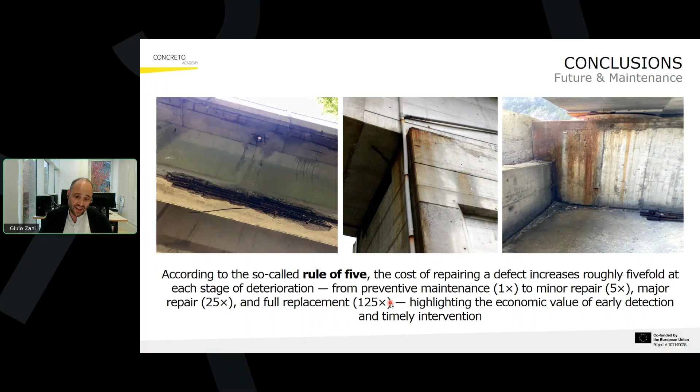In doing this, it's important to always remember what we call the rule of 5. If the cost of preventive maintenance is 1 and this is postponed, you might have to introduce minor repair at about 5 times the original cost. If you avoid the minor repair, major repair might lead to 25 times the expense, and full replacement even to 125 times. The growth of the economic burden of defects is exponential, not linear. So the first and most effective response to structural deterioration is regular maintenance and continuous observation, which allow the detection of damage and prevent costly interventions over time.

The last message I leave you here is that at the same time, it's essential to continue developing innovative materials, because this will be the basis for retrofitting existing structures, but also for designing new durable infrastructure.

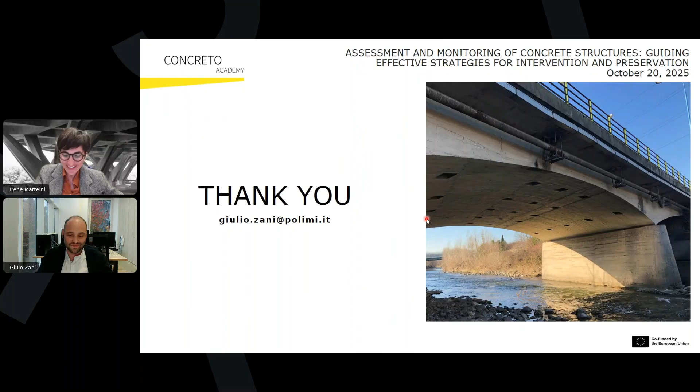Thank you, Giulio, for this hopeful presentation. We are now close to the finish line. There are just a couple of questions, and then we're not going to delay any further. We will let you go out, have an aperitivo and dinner.

The first question is: by comparing results of both dynamic analysis and load test, were you able to make some consideration on the dynamic Young's modulus of the existing concrete?

In this case, we actually extracted some properties on the elastic modulus of concrete by means of the ultrasonic pulse velocity test, mostly, not directly from the structure, because we also had the problem of the presence of pre-existing cracking. This pre-existing cracking could not be explicitly introduced inside our model because we have, in this case, a homogeneous three-dimensional model. So we modified the elastic modulus somehow to capture the behavior, but we tried as much as possible to keep it consistent with what came directly from the diagnostic campaign.

To address this information, in some cases we also tried to reduce the elastic modulus at specific locations, as is generally done, by 50% in the cracked regions, but this wasn't sufficient to obtain a good match between the numerical model and the experimental observation.

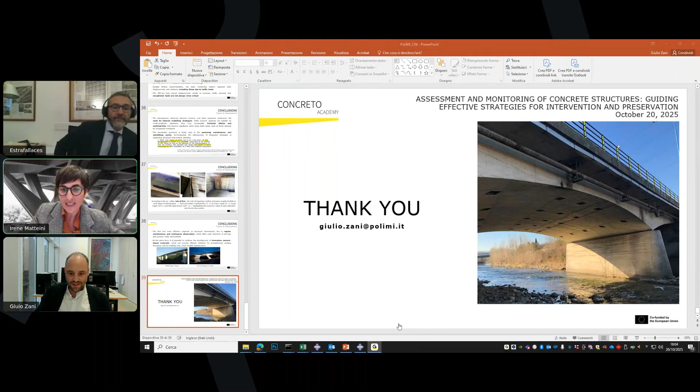Very much agreed. I think, in closing today, thank you very much, Giulio and Thomas. We've seen really a diverse array of techniques, from the more sophisticated ones to really simple techniques.

The key message we would like to convey today is that conducting a proper assessment is very important, but it's also indeed very important, when approaching a new project, before going out there and using all the techniques, the fanciest ones, to first understand what types of information you need, what your research questions are, the answers you're trying to find. This should really drive your approach, not the machine, the testing equipment.

Because sometimes you don't need all the fanciest things out there to get the answer that you need. And this reconnects to the fact that you don't always need a big budget to conduct assessment. As professionals, it's also your duty to push an owner to really do this before asking you to design details or determine specifications on how to intervene.